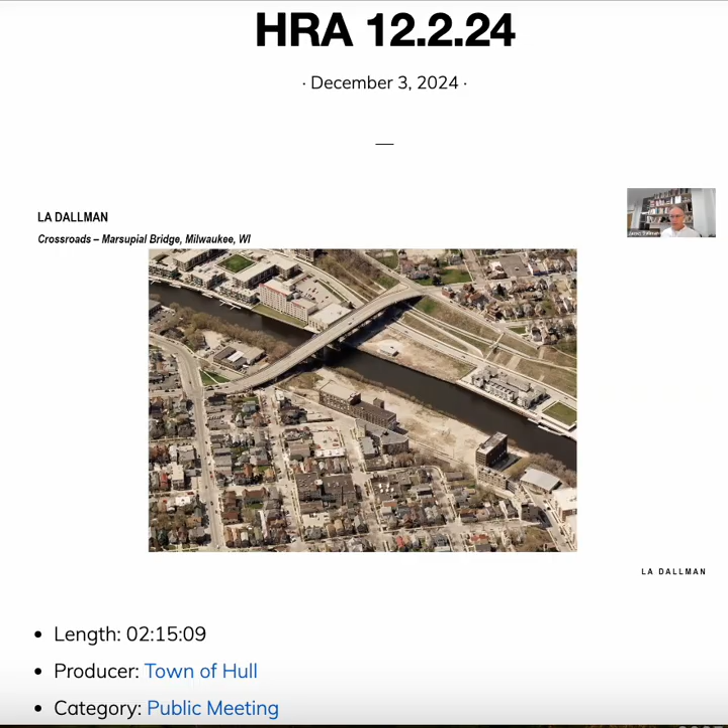James, over to you. So one of the examples is the Crossroads or Marsupial Bridge project in Milwaukee, which was on a site owned by the city, but had a number of advantages, including that it did not require easements or foundations to build a new pedestrian and bicycle bridge across the river, adjacent to two very dense and growing neighborhoods.

And the complexity of the project is hinted at by the various stakeholders that were involved, from the Department of Public Works, the Department of City Development, Wisconsin Department of Transportation, and a number of local stakeholders, including the Brady Street Business Improvement District, who provided seed money to help kind of jumpstart the project, which included connections to bus line, pedestrian bicycle access, as well as some civic space making.

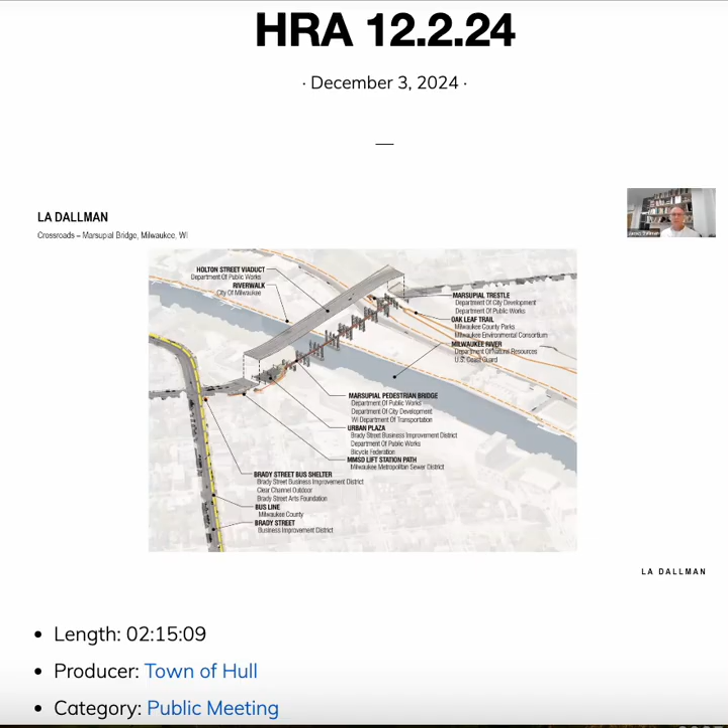The project spans 650 feet beneath this existing viaduct, which was built in 1925. So it uses that structure as its host and is carried by it, so it required very little foundation work. So it was effectively a very cost-effective use of land and structure. The original bridge used to open at the center and was overstructured for a streetcar system that ran over the top. That was later welded shut and turned mostly to auto traffic, but that had some extra capacity to support this new structure.

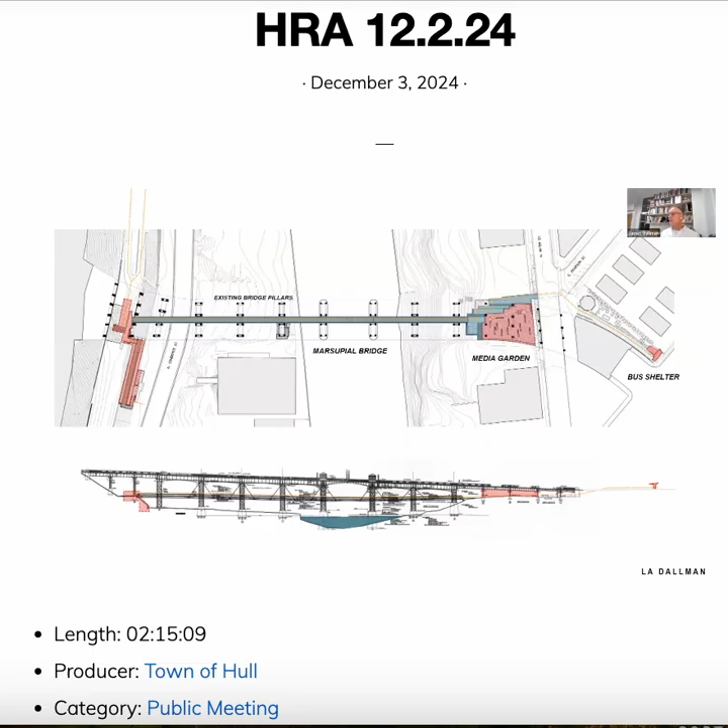So this is just kind of calling out various pieces of the project, but the primary issue was to take an existing structure that had the extra capacity and sling this new pedestrian and bike bridge beneath it.

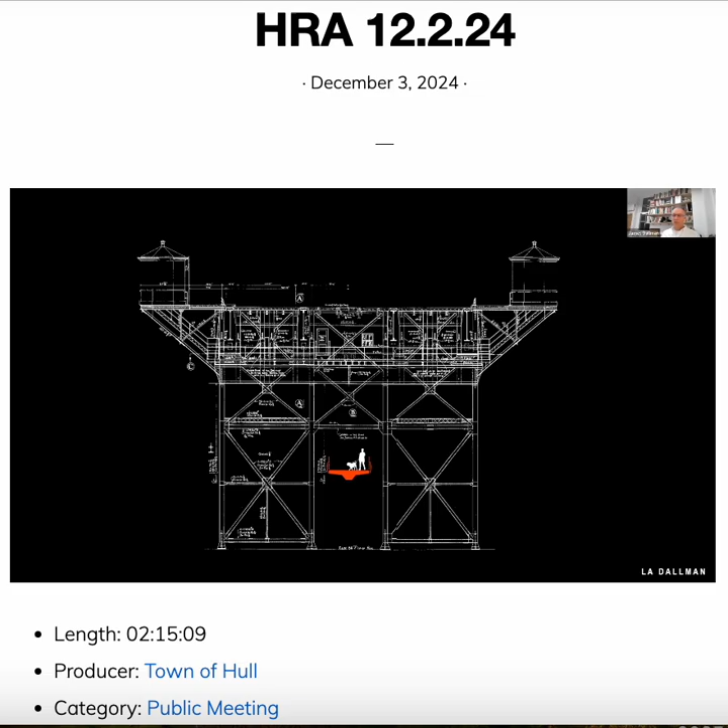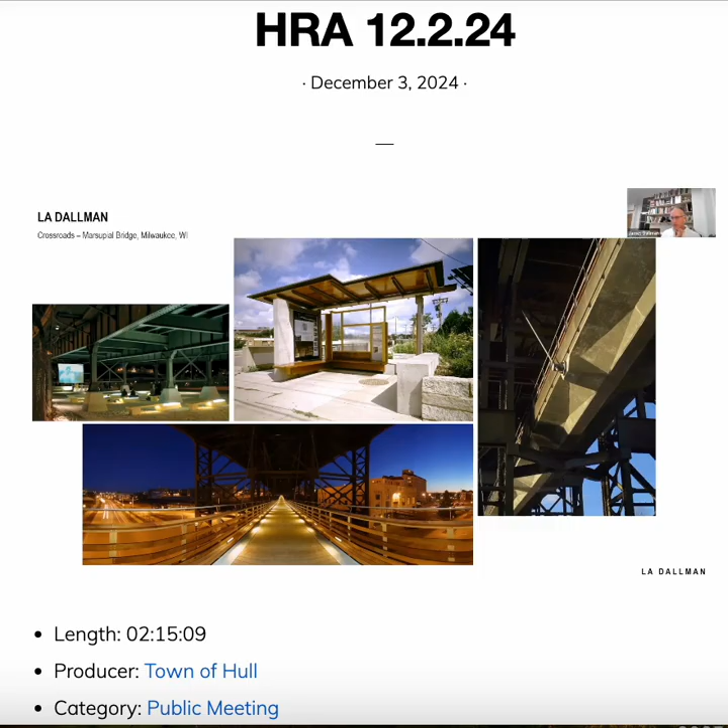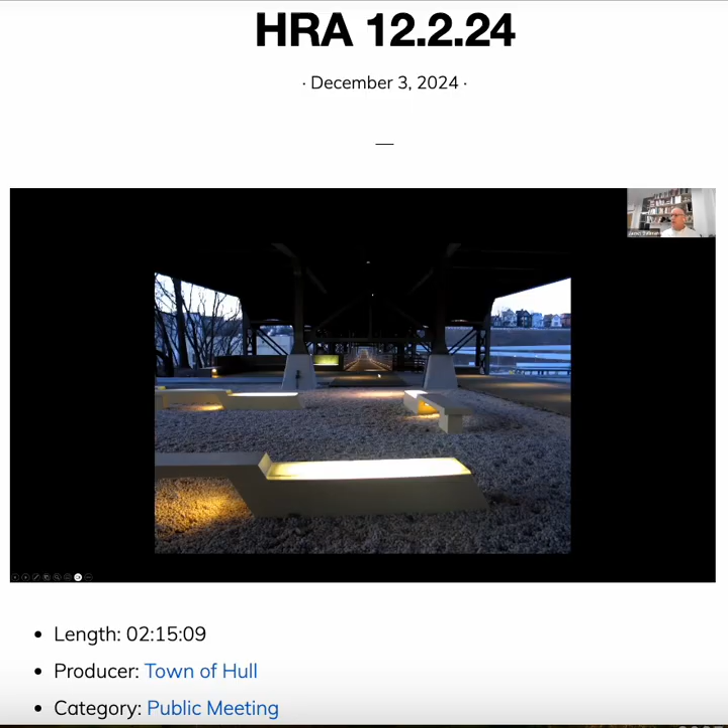The resulting components of the project, and in the middle, it really started with this bus shelter, which was funded by the Brady Street Business Improvement District, along with a master plan study for the whole project. It has become something of an icon in the city. It's very approachable from both directions. It has public spaces at both ends, and these spaces have been used for a variety of obviously daily use for bikes and pedestrians, but also a number of arts and civic events taking place in these public spaces.

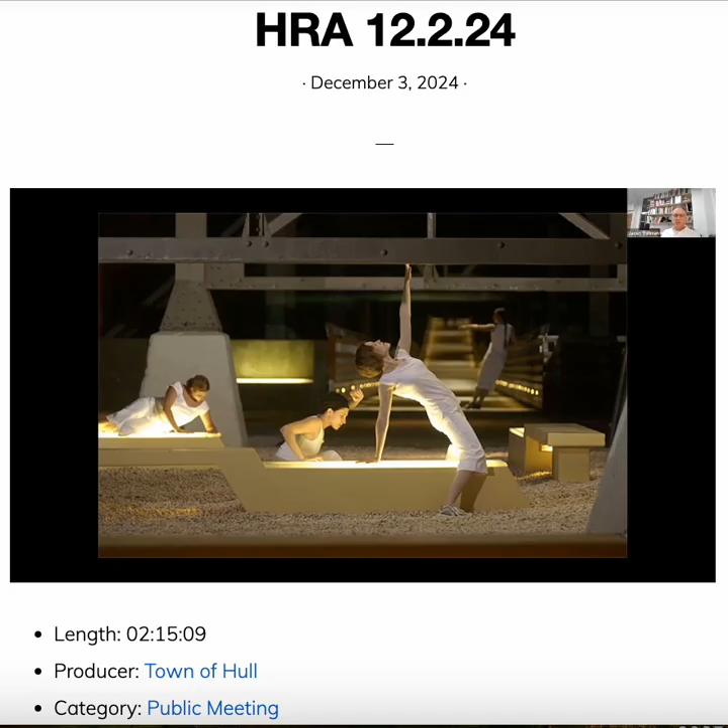The project really, again, started with the seed money from the local business improvement district, which drove a master planning process and the building of the bus shelter, bus stop structure, which was kind of the beginning and the gateway into the project. And that was leveraged for continued funding review and grant proposals by the city that we helped them write, that went after federal funding through congestion mitigation and air quality improvement grants for pedestrian and bicycle infrastructure.

The project I just mentioned took about 12 years from beginning to end. We're also the kind of practice that has the staying power to work through very large, complex civic projects, sometimes of long durée because of that nature.

Another project currently ongoing is a pedestrian bridge, a shared use path bridge in Concord, Mass. They had initially done a feasibility report to look at sites to connect across the Assabet River, and invited us to look specifically at the design components.

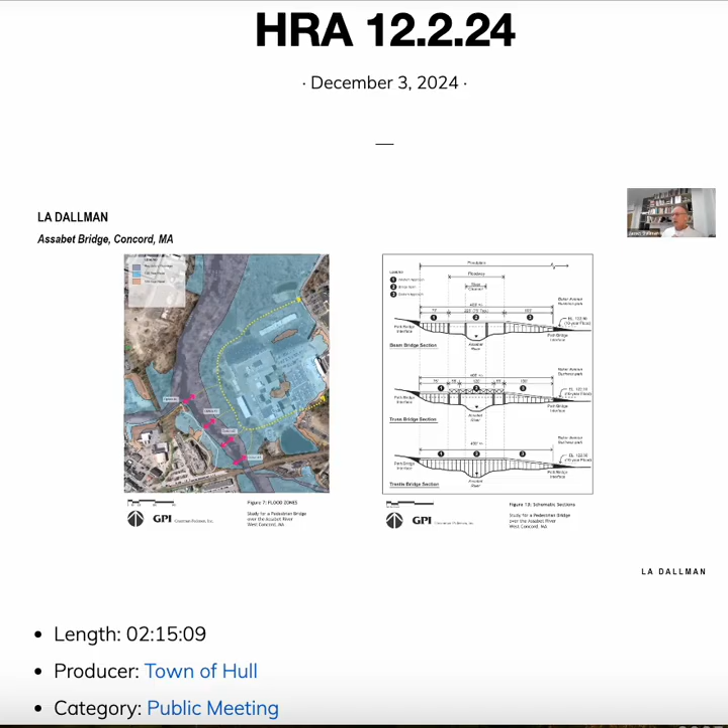This is an engineering report they had done to test feasibility, but it was lagging behind and not getting funding, so it needed a jumpstart to push it ahead with more civic impact and consensus building. We were asked to come in, provide a series of designs, review them with the public, and build more consensus and community engagement.

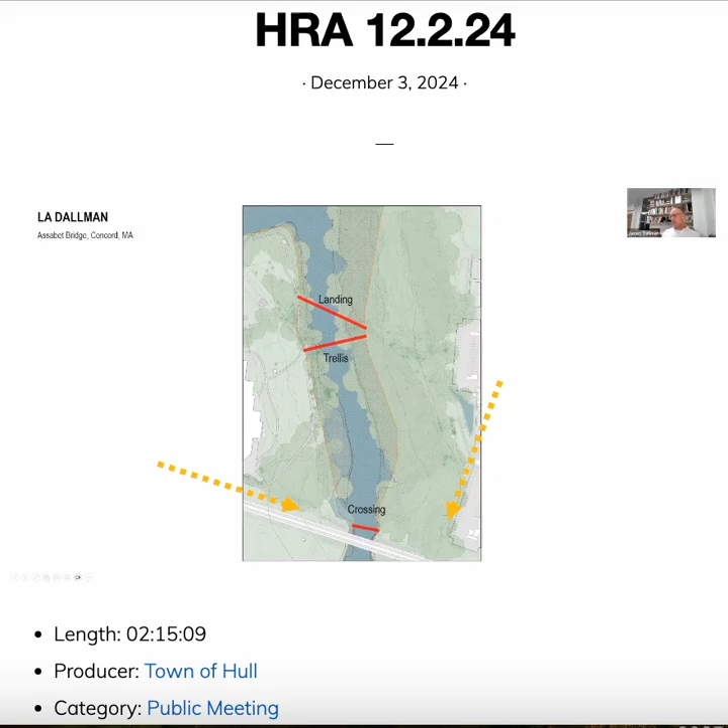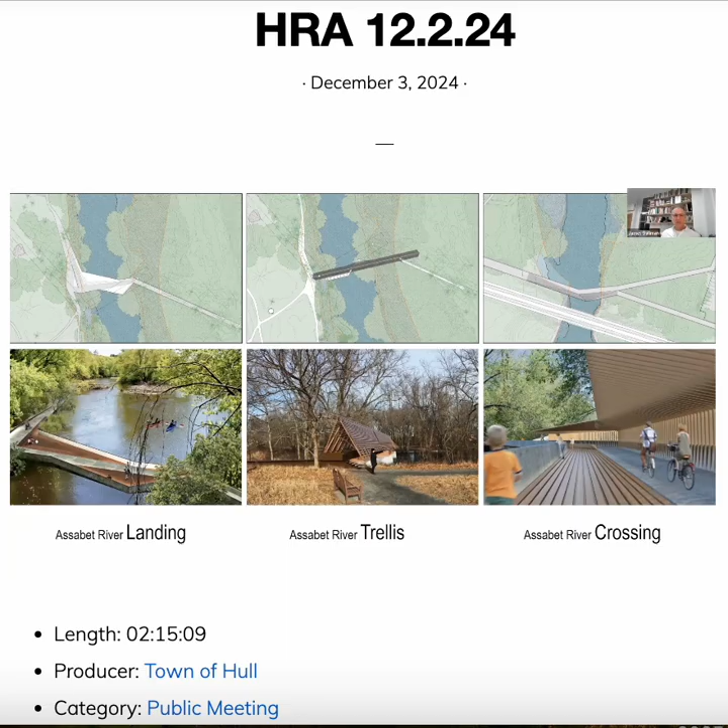We presented three schemes: the crossing, the trellis, and the landing, at different points along the river. The crossing scheme, at the bottom, is closest to an MBTA rail bridge, which provided an interesting opportunity—it's the one on the right in this series of presentation studies we made to the community at a public meeting.

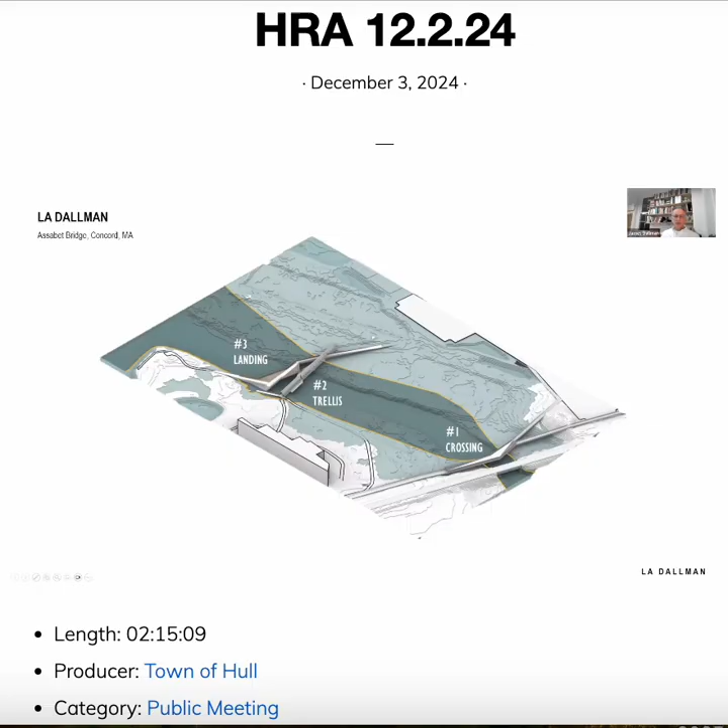We ended up with the crossing scheme, closest to the MBTA bridge, retaining the most open space of this conservation land. It's closest to adjacent development, has the shortest span across the floodway, and was immediately adjacent to the MBTA bridge, which caused complications since it felt very close and impacted by the train. So the plan included a veiled structure which shields it from the MBTA while providing coverage underneath.

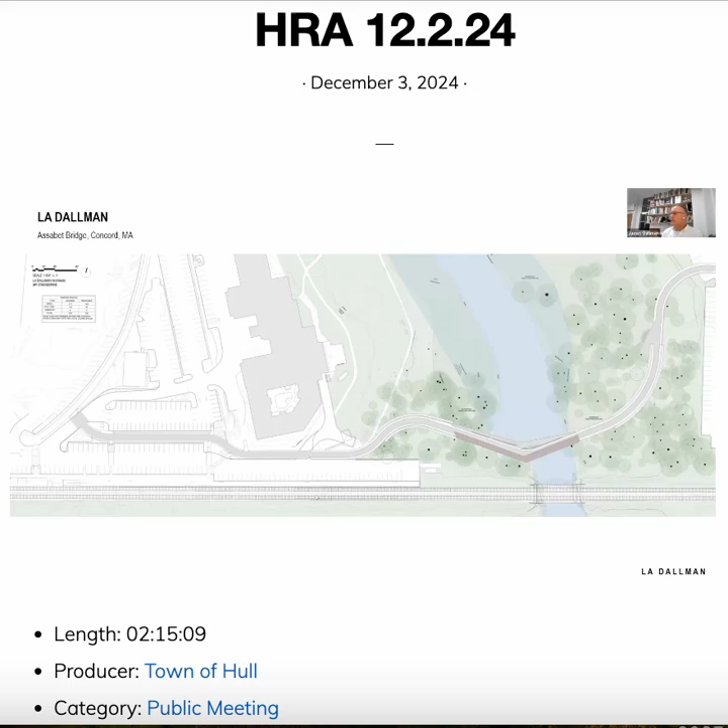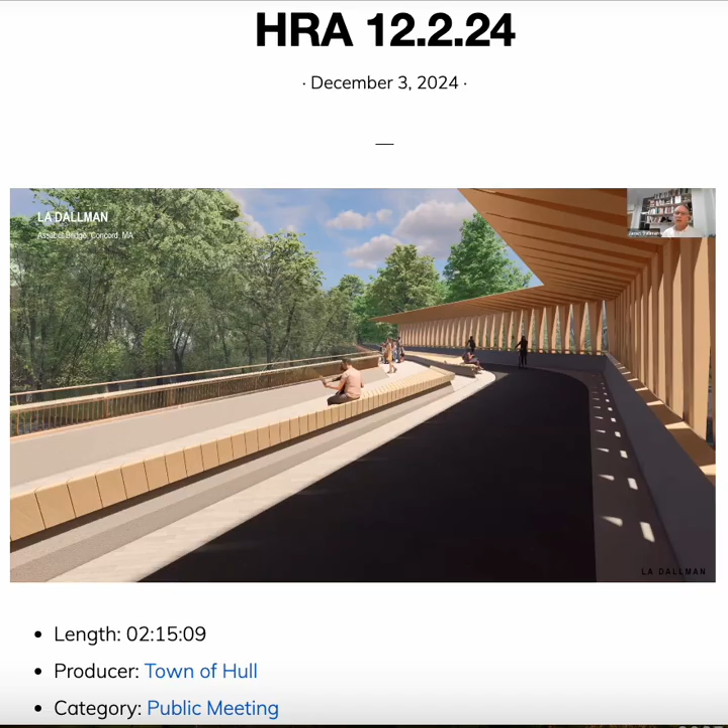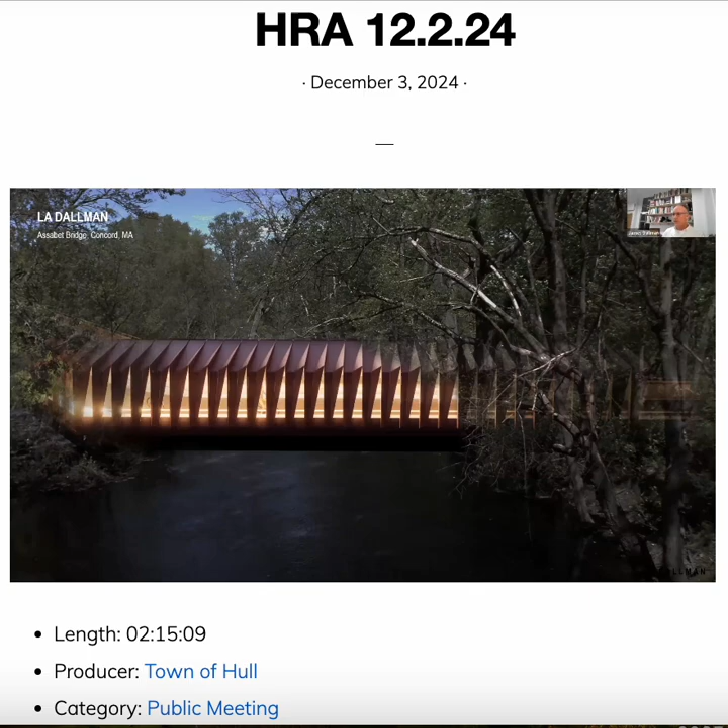This is a view of the current plans, heading into 25% plans submitted to MassDOT. We've gone through the initial phases of review and are at 25%. There's a shared use path, the veiled structure along the MBTA bridge, and a public plaza at the center span overlooking the river, creating a public meeting space. This is a view from the MBTA bridge as you pass by the site.

This has gone through public meetings and workshops to tune the design, pick a favorite, and get the public engaged. A Mass Trails grant and CPA funding were submitted and approved. There have been more town meetings to review detailed design and more MassDOT funding approval, and we're at the 25% stage right now.

This is really one of our favorites and perhaps one of the most complicated projects we've ever done—the granary project. It's a wood structure built in 1901 to hold grain for the community and for long distance shipping, from upstate Wisconsin in a small town called Sturgeon Bay.

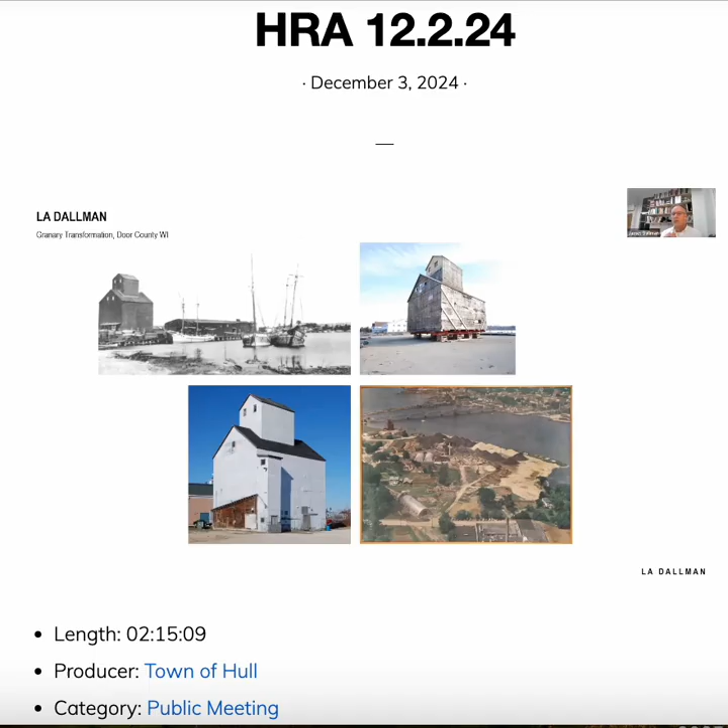It was originally one of thousands of local distribution hubs for grain, spaced out at about 7-mile increments so farmers could reach them in a day's ride. But there are now only two of these remaining on the Great Lakes, and this particular instance was saved from demolition by a community group that had it listed on the National Register of Historic Places.

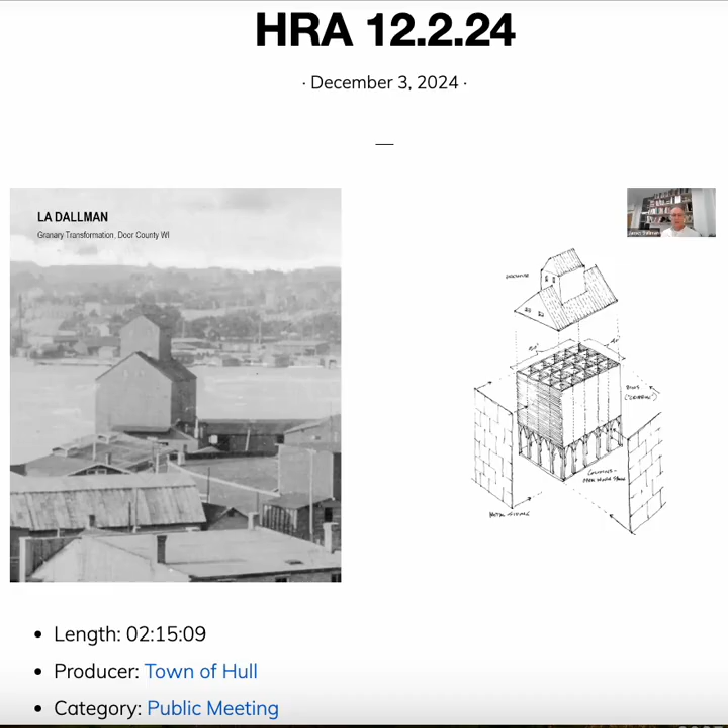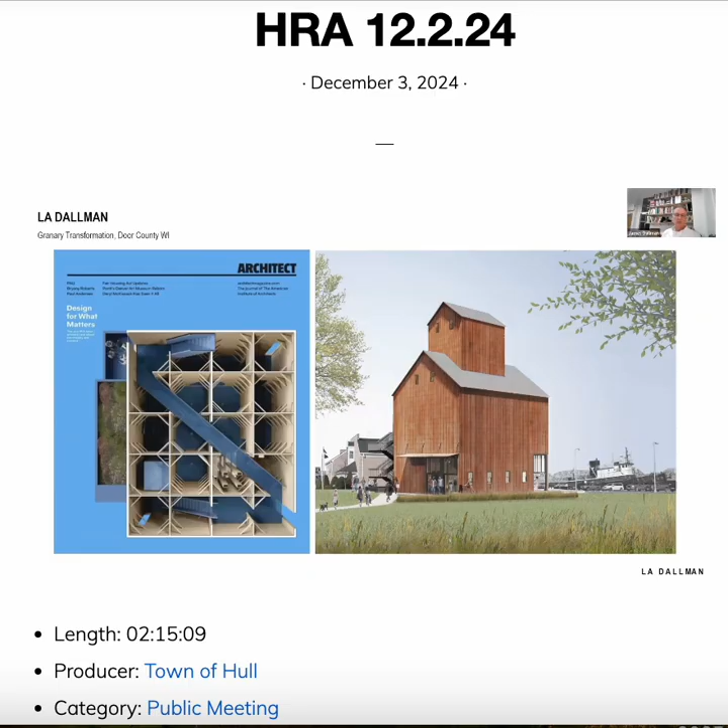It's a massive structure, very simple from the outside but with a very complex interior of solid wood walls. We went through a master planning process with them and won a prestigious Progressive Architecture Award for the master plan design, praised as innovative adaptive reuse, which also helped them tremendously with fundraising.

The project includes this tall ground floor space with new windows, converting it into a museum with a series of passages and a staircase leading to the top of the structure to activate it for public use.

We just completed phase 2 of the project, which opened a few weeks ago. It's now fully enclosed, has restrooms and support space, and is clad in reclaimed material from another granary being torn down in the area. It also has new steel windows.

As I said, this was frankly one of the most complicated projects I've ever worked on. It involved many reviews with historic preservation officials at the state level, local coordination, and DNR review because it's on filled lake bed.

The master planning for the project really helped motivate a lot of the fundraising and the approvals, and in fact, the building had to be moved back to its site after being partially condemned, before it was listed on the National Register.

James, I'd like to interrupt and ask a quick question. Could you go back to that beautiful image of the cutaway of the building as you redesigned? What were the ADA requirements in regards to people accessing the building?

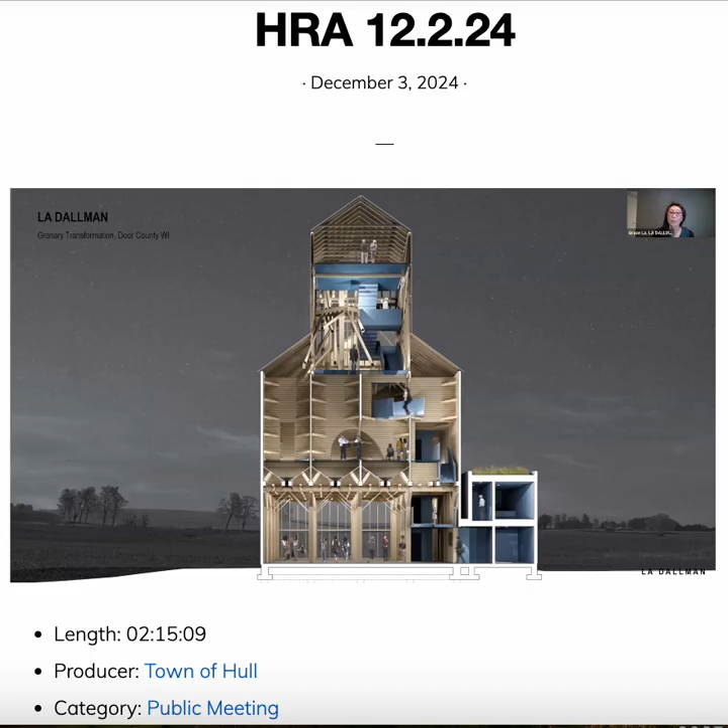Has this been done now? Phase 2 is complete, and we're on phase 3, which will bring the upper head house to life.

So the ground floor is now open for public use, and they're holding functions there already. The building, as James mentioned, has been brought back to its site. There's a very funny movie you can find online of the entire building being moved across the bridge. And it's been reclad, so it's weather tight now.

The goal is to get into the 3rd phase. This is actually staggered as well, partly due to fundraising issues, so the organization we're working with can build funding capacity in pieces to pay for it. The 3rd phase will bring the head house to life by allowing the stair to reach that top level.

We just had a soft opening for phase 2, which makes the building fully accessible at the ground floor. The project was largely funded through a combination of large and small donations from individuals, driven by the master planning process and us meeting with donors and presenting the scheme to them.

We also helped the Sturgeon Bay Historical Society submit for USDA funding through the state, and they acquired an additional $3.2 million out of that state funding. They had originally raised about $2 million through private donations, then about 3.2 through the USDA funding, and the remaining phase 3 work, including the elevator and stairs, is about another $1.5 million being raised through private donations.

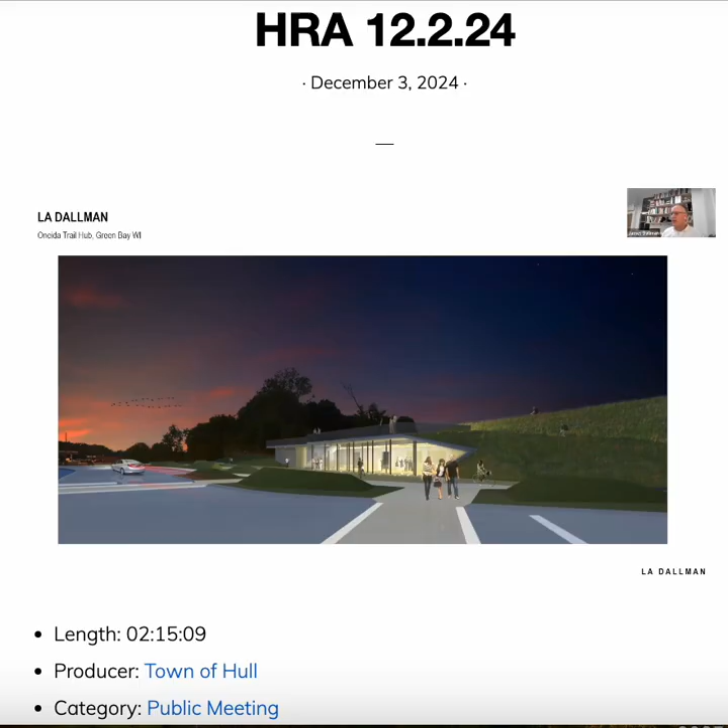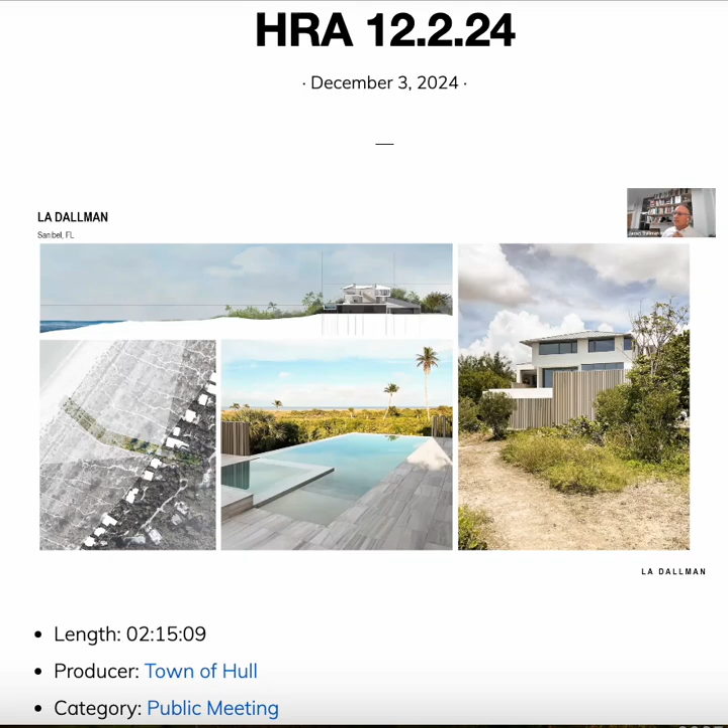There are some other projects we have ongoing, including some civic spaces for the Oneida Nation in upstate Wisconsin, and some small scale housing interventions in Green Bay. We're also used to working on coastal sites, so we just completed a house in Sanibel, Florida, with a 13-foot storm surge, that's already gone through 2 hurricanes, sadly, but is in good shape and designed to meet those requirements.

It's a private home, I assume you're speaking about? That's a private home, yes. One of the reasons we take on such a wide variety of work is so that we can, in a cross-disciplinary way, really understand certain kinds of issues and apply them to other types of projects. We find the coastal project is very much informed by the detailing work we've done on projects like the granary, so they cross-fertilize the work that we do.

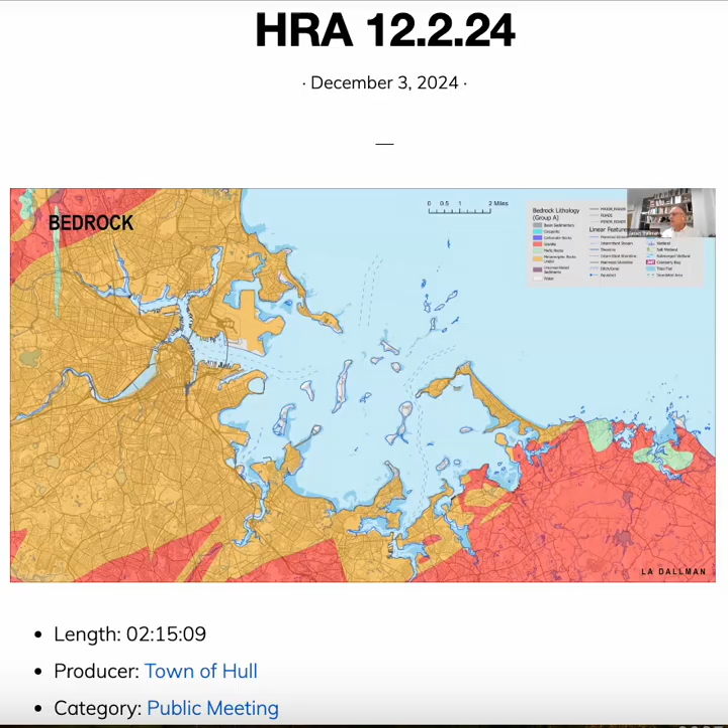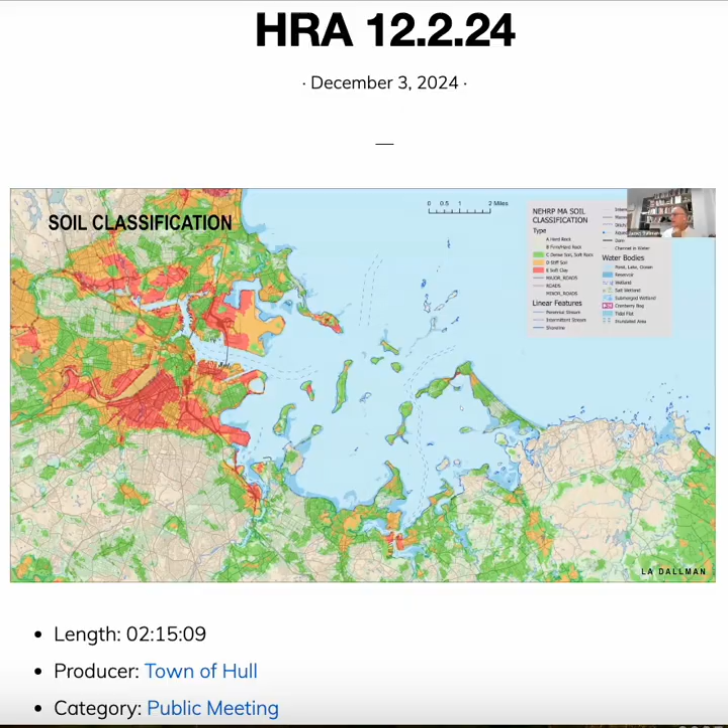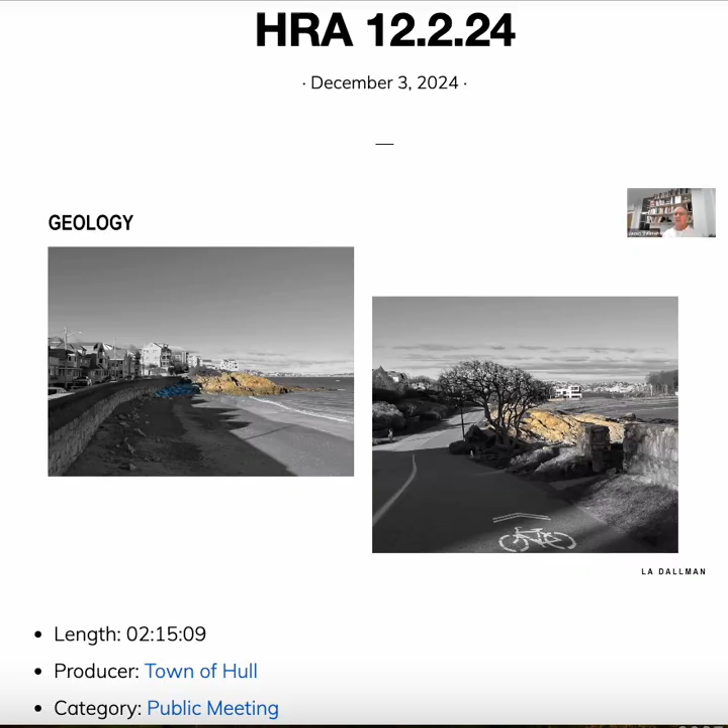The bedrock is granite and different metamorphic rock, but at the level of detail of the site, it becomes more interesting with this dense mix of hills and the beaches around Hull. We find the poetry of those rock outcroppings very inspiring - this is a moment I captured on the site. You see this frequent outcropping of granite, as well as the larger formation of the hills in the region, always changing with tide and wind.

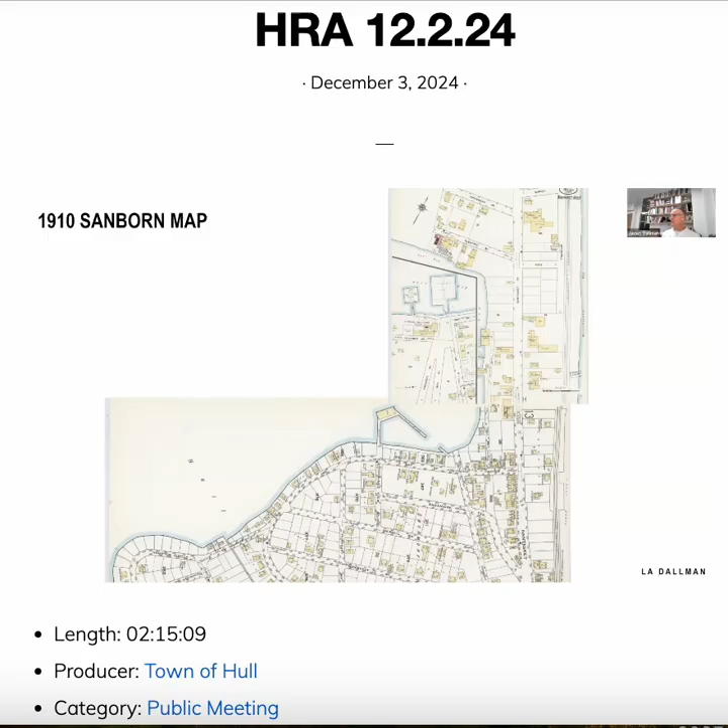Likewise, the HRA land has been transformed over the years. We noted that it's very interesting that it has had buildings on it in the past as an extension of the business district. It's not really virgin land, it's been changed over time. But unlike many of the iconic conditions of Hull, the site doesn't seem to have a particular identity, at least as places that are named in Hull. This is kind of an in-between space, a transition between Surfside and Whitehead.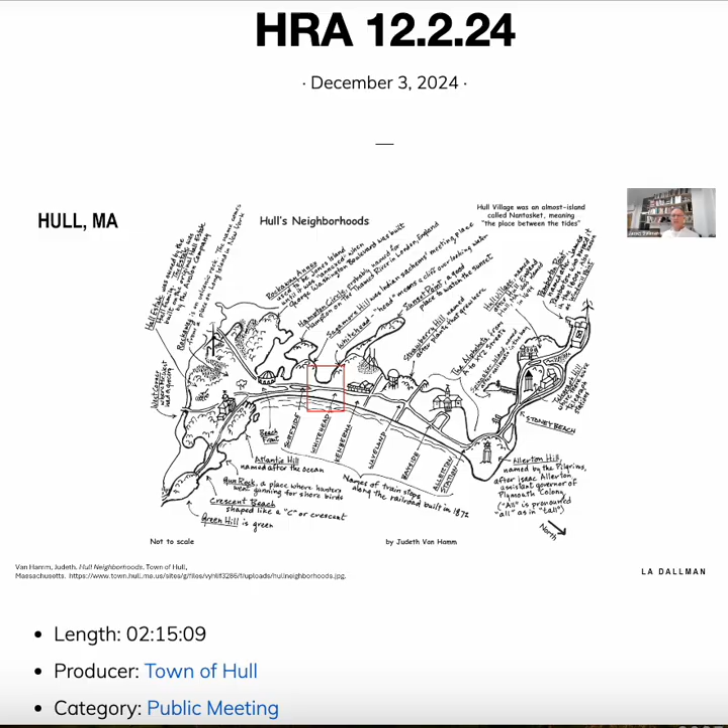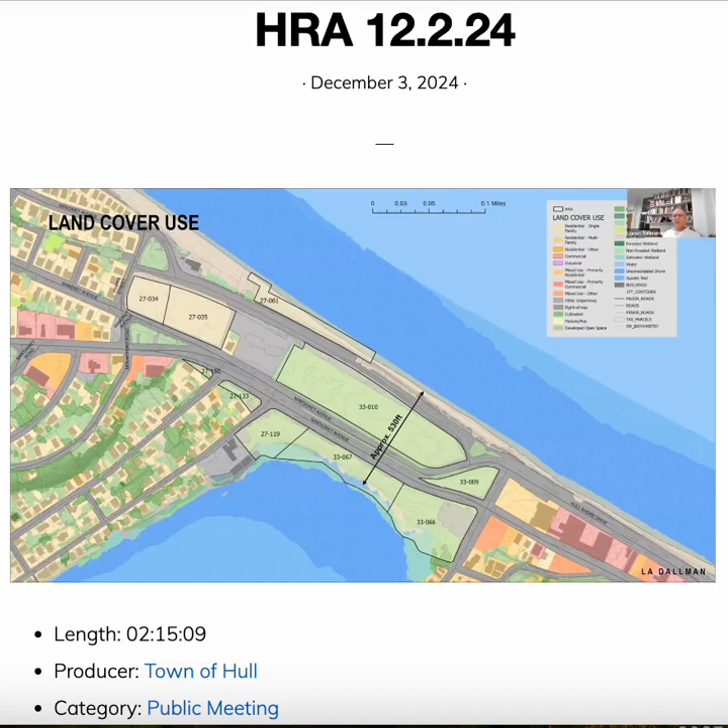So our current understanding of the site, the total acreage, this broad 530-foot wide space between the Salt Marsh Bay and the ocean. But we find it interesting that within a short distance, the site shows a very interesting identity from the Salt Marsh, the road itself, the open green space, another road, and the ocean. I took a series of photographs when I was out there last Sunday that describe that subtle transition from one space to the next. The sheer breadth and scale of the site is really spectacular. I happened to catch it on a day with a low tide.

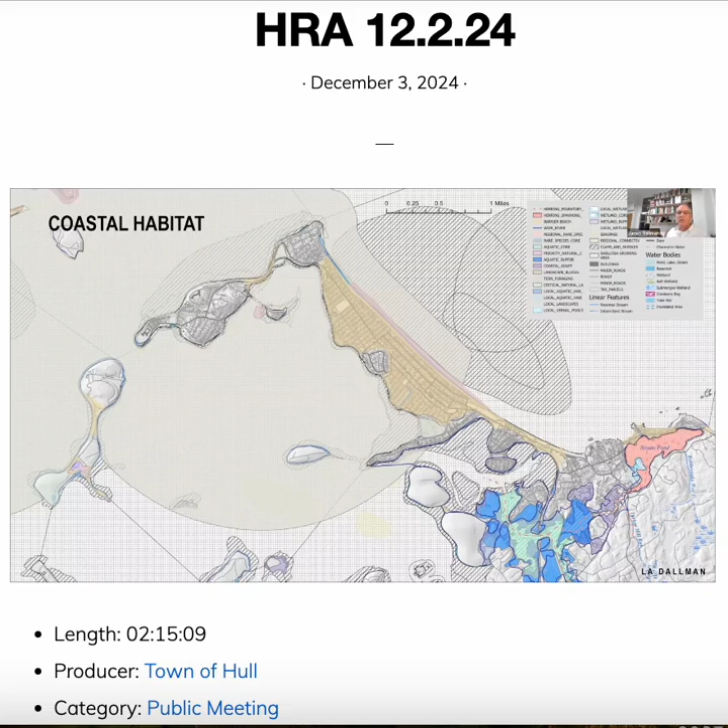As a barrier beach, Hull provides protection for the aquatic zone, the habitat and salt marshes to the south, home for rare species. There's always kind of a reminder of the natural environment that surrounds the site.

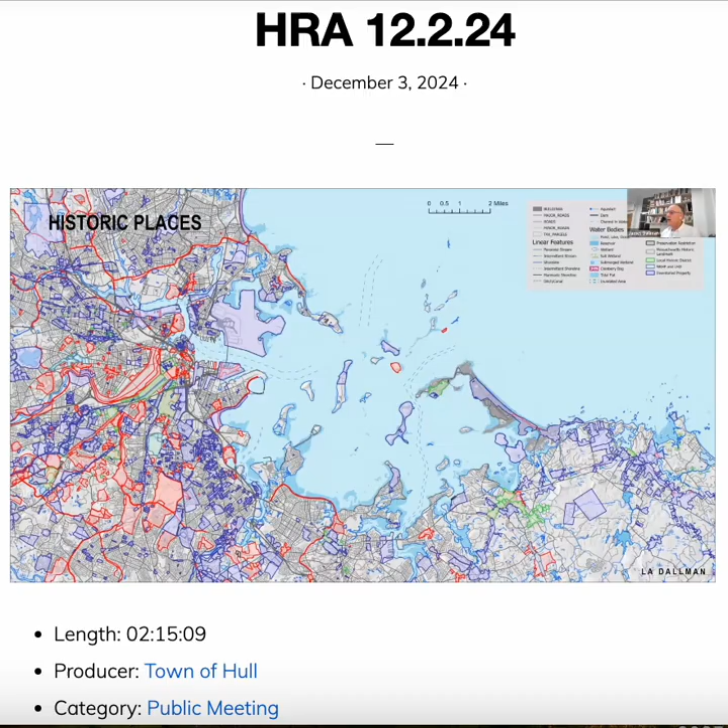There's obviously links to historic Boston on the site itself. We noted the local historic district to the north, the inventoried properties, and the national historic places, including Hull Shore Drive.

What are you referencing there, James? The Hull Shore Drive being registered on the National Register. Oh, okay, I didn't know that, so that's interesting.

By the way, we apologize because we're aware that you know this site very well, so please forgive us if we're in a way preaching to the choir when we talk about the beauty of the site. It's just actually what inspires us, and we thought we would share with you our interest in what we know about the site. No, excuse me, I'm appreciative of the fact that I just learned that Hull Shore Drive is on a list of historic places, National Register. I didn't know that. Dennis, can I ask a question?

No, of course. Going back to that previous slide, what is an inventoried property? I've never run into that phrase before. If it's not relevant, that's fine. I was just curious that some of the town seems to be inventory property and some isn't. It is interesting, and I don't know the origin of that, but it's obviously present in large areas, including some of the islands as well.

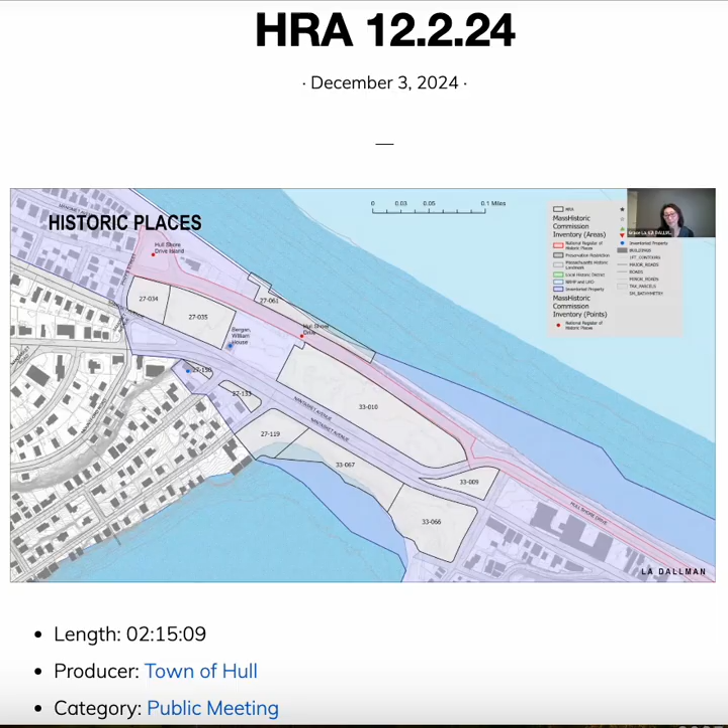This is all from ArcGIS, and it's also registered on mass government websites. We overlaid in many cases some of our own coloring to make the diagram a little bit more clear. Thank you.

We've also been looking back at some of the history. We know this site has a deep history and lots of activity, especially further south with the fairgrounds or the amusement park. This linear layering of the site has been present for quite some time, this relationship between building and landscape, between the bay and the ocean.

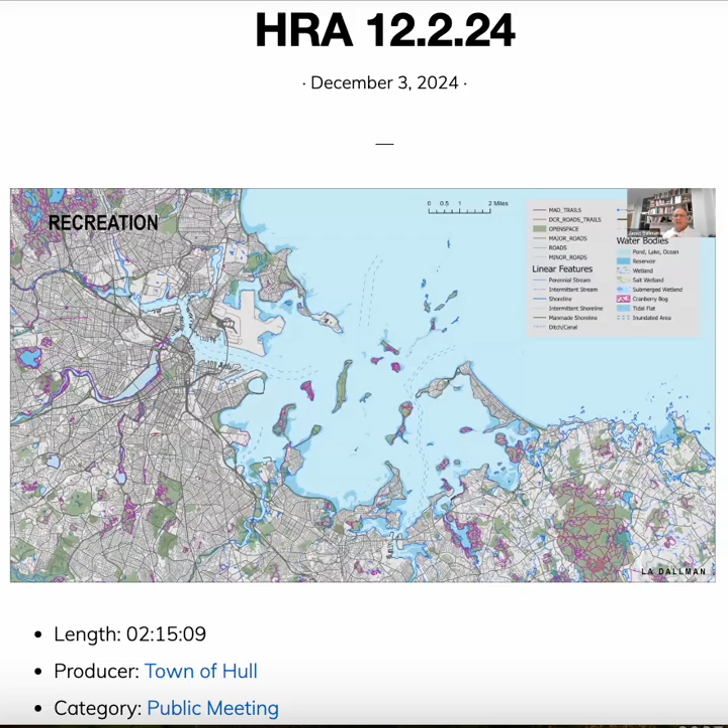Just zooming back out and looking at recreation, that's a key part of the site's history. DCR obviously has a lot of property and stake in this area, and I think the coordination with DCR lands and DCR objectives is critical for the HRA and for your site.

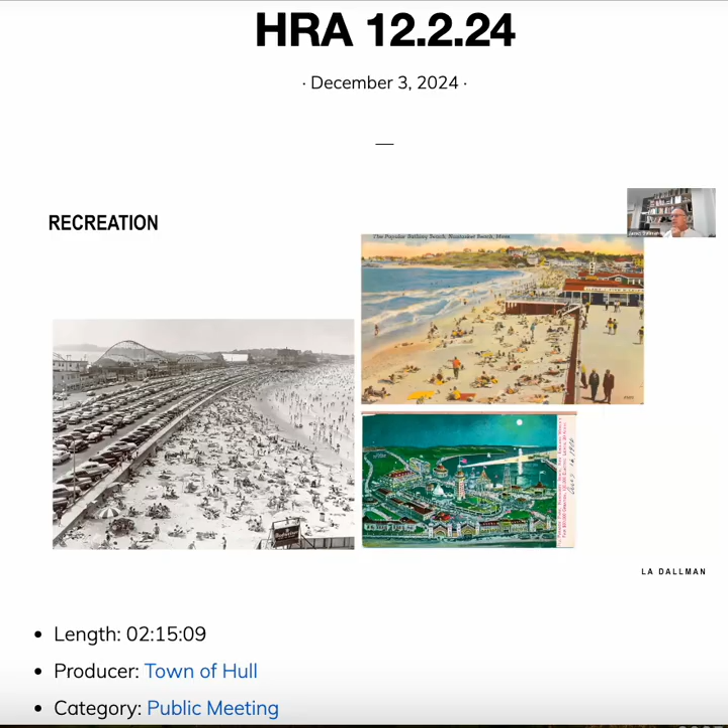Site access is obviously important for a peninsula. How does one get to Hull? Obviously there's car, ferry, bus, bike, walk, and all of those different circulation patterns come to a neck through your site and become very critical.

Bike trails seem to kind of terminate at the site at the moment, but it would be nice to see the bike trail continue on. The 714 bus runs past the HRA site, but for some reason the bike trail kind of terminates.

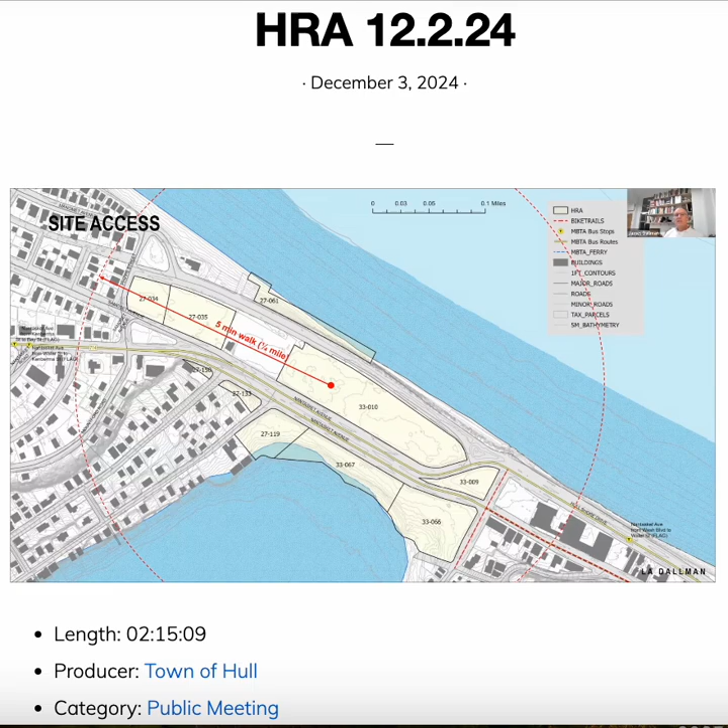We understand that the Hull trolley is no longer running, but it's certainly an interesting part of the site, and there's potential for multiple modes of transportation through the site.

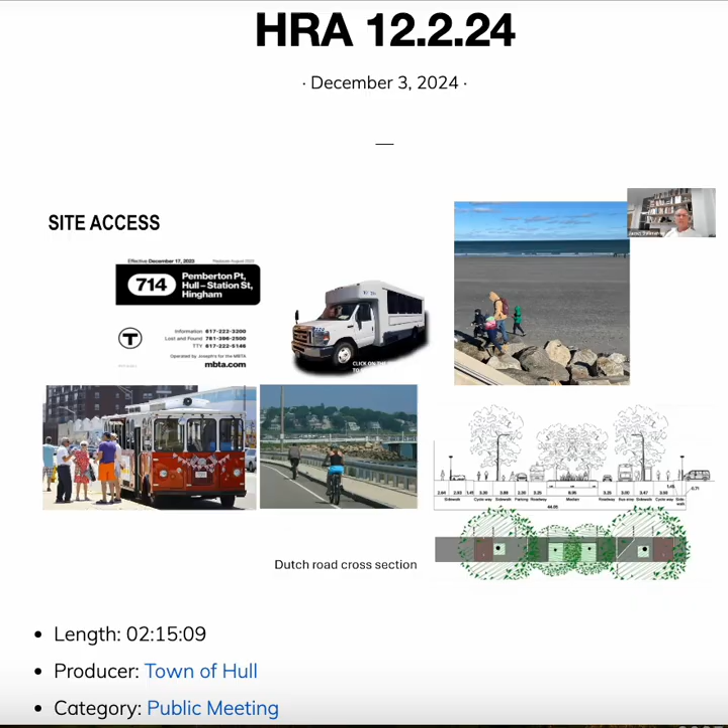Zooming out again, obviously the category 4 hurricane coastal hazards are a really big issue, and this is all generated from our GIS as well.

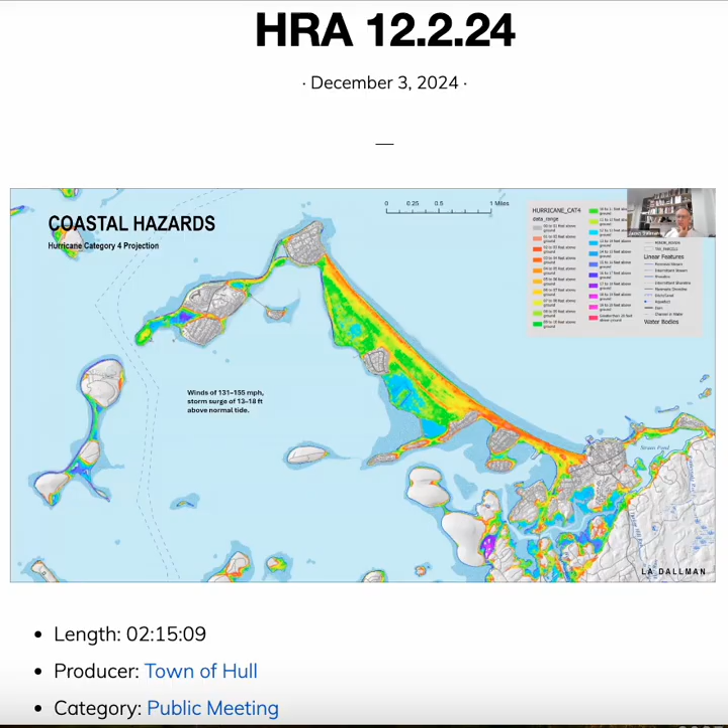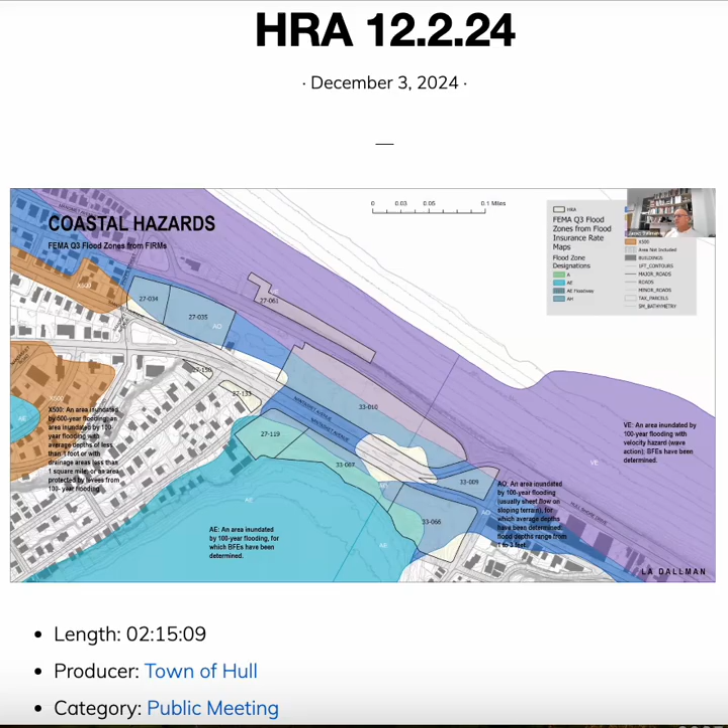Flood zones at the big scale and at the scale of the site: there's a 1% chance of flooding over most of the site.

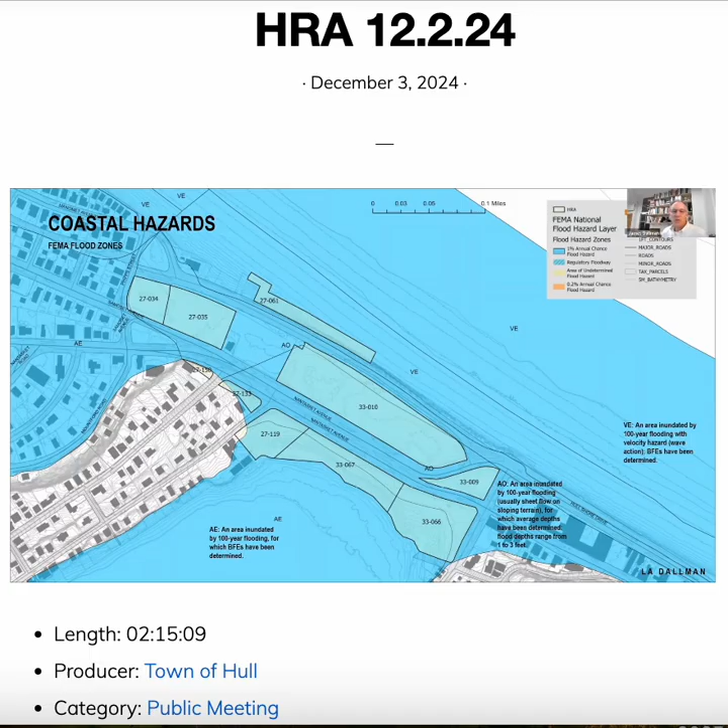That's very helpful to understand the relationship with the topography, because it does actually look relatively flat, but once one really understands it, there's technically a lower point where the flooding would actually inundate.

So we just did a quick GIF of the future projections, current and future, based on GIS of storm events inundating the site.

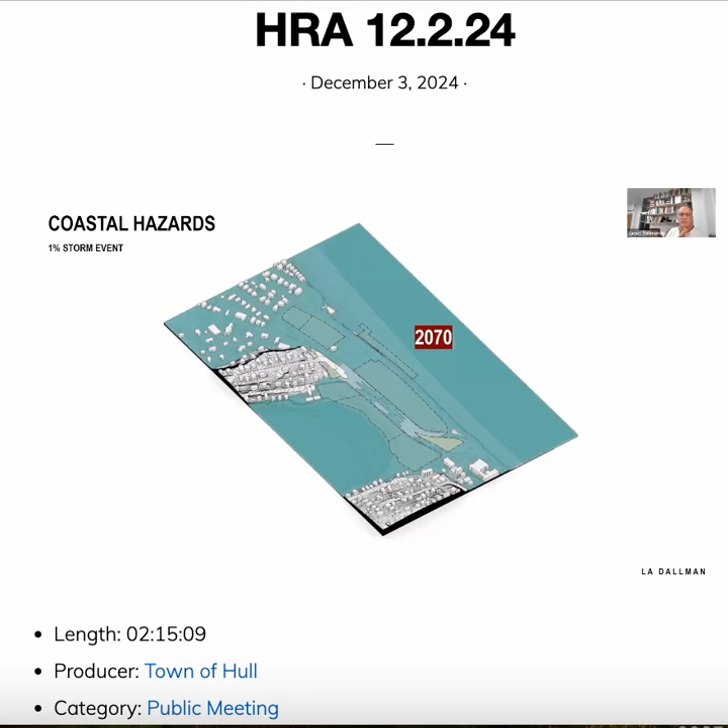So next, just sharing some ideas. We know there have been a bunch of proposals and site studies completed since 2015, and there's a lot of really good information there, and we know you have some ongoing work with the road improvements.

But we've also seen the surveys about walkable space and gatherings being two of the most important.

I'm going to interrupt here - where did the survey come from? Was this the one we talked with Erin about? This was from the Hull Times. Yeah, so an independent poll. I'm going to ask you not to spend any time on this, only because we talked about this at one of our meetings, and it's more of what we call a polling survey. So let's keep to a high level. Sure, that's fair. Thank you for mentioning that, we want to keep it moving and share what's relevant.

Just in general, some of our takeaways were that there are 4 major theses or themes: to connect and give Hullonians greater access to the Boston metro area, to respect Hull's history, native habitats, and public access, to protect the HRA site from flood events due to climate change, and to sustain through funding and revenue for the HRA site.

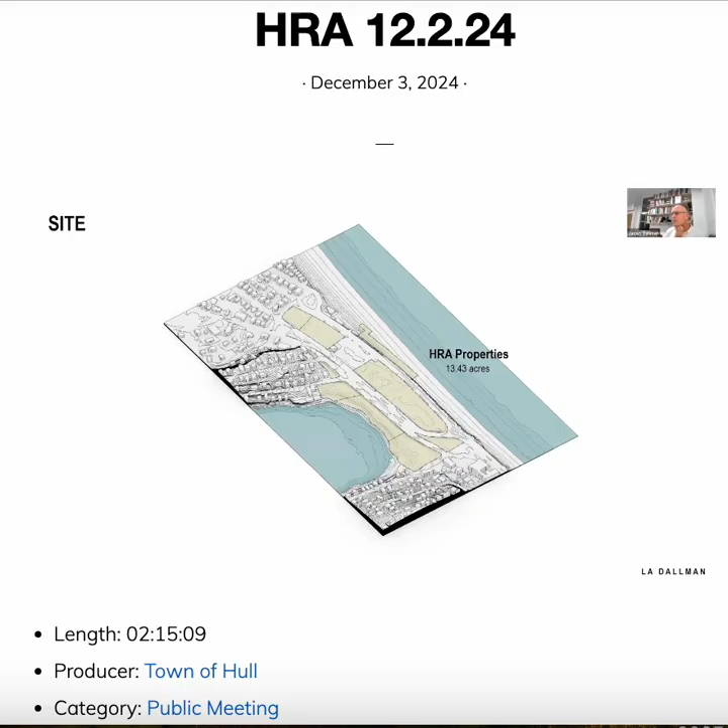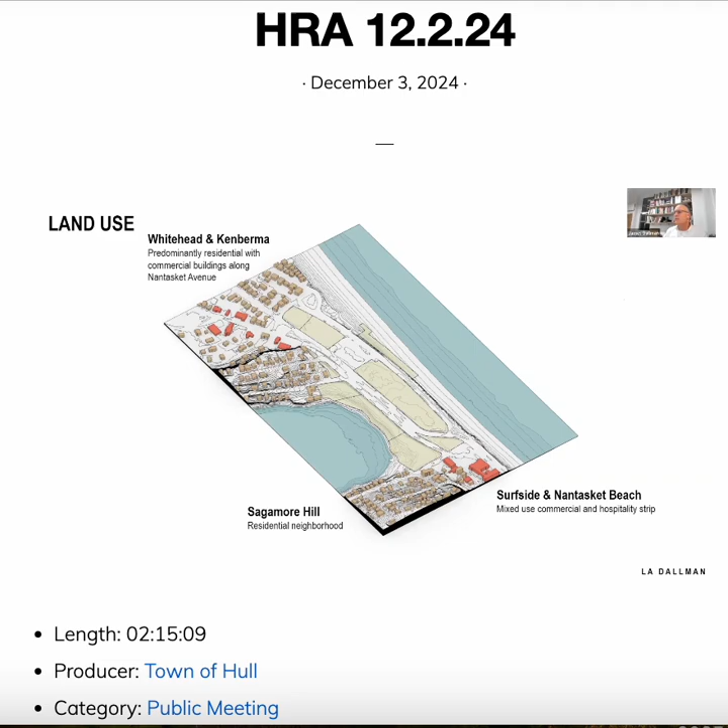This is a quick overview of the site in 3D. Just looking at the key components, looking at adjacent neighborhoods and mixed use, housing and mixed use, looking at access, the main circulation patterns, and looking at travel times.

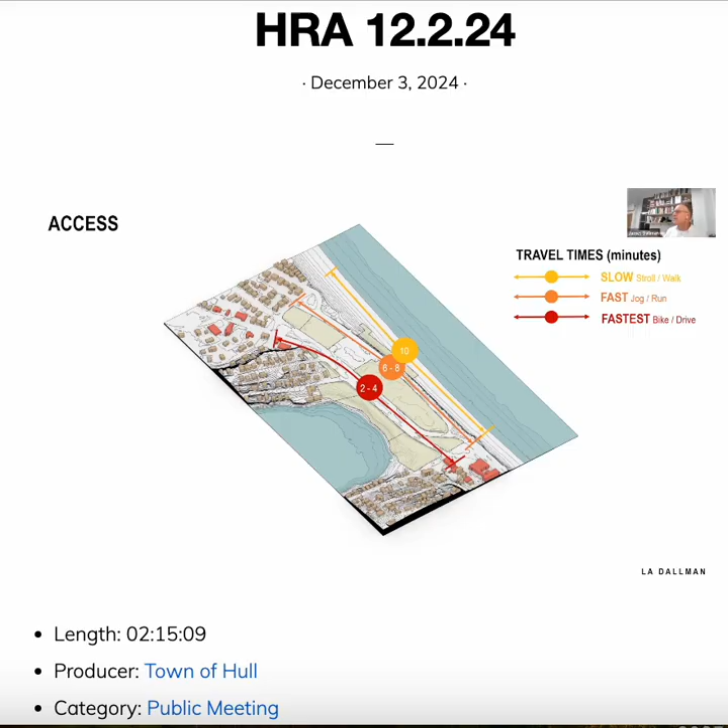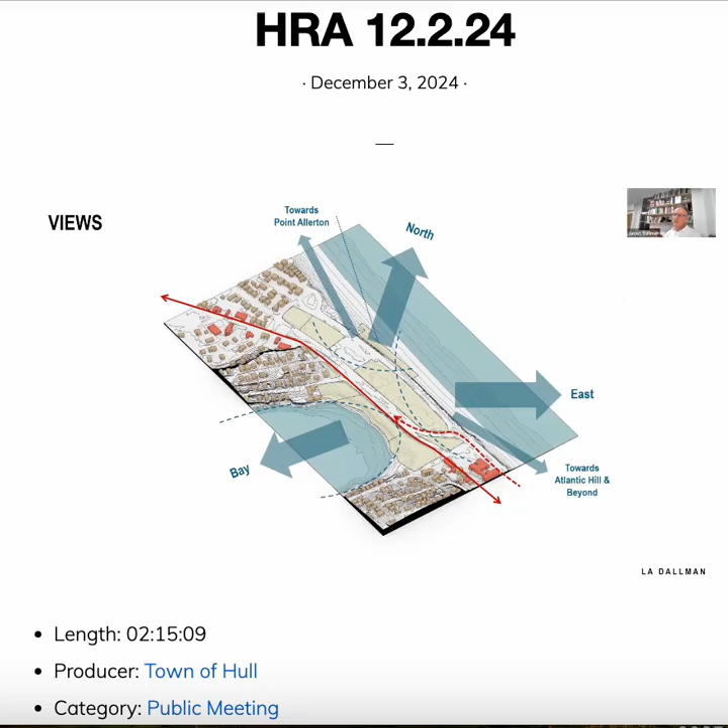Looking at the key view sheds, and that cross section through the site is so interesting and gives you these views back to Boston and out to the ocean, as well as diagonal views up and down the coast, exposure to sun and wind.

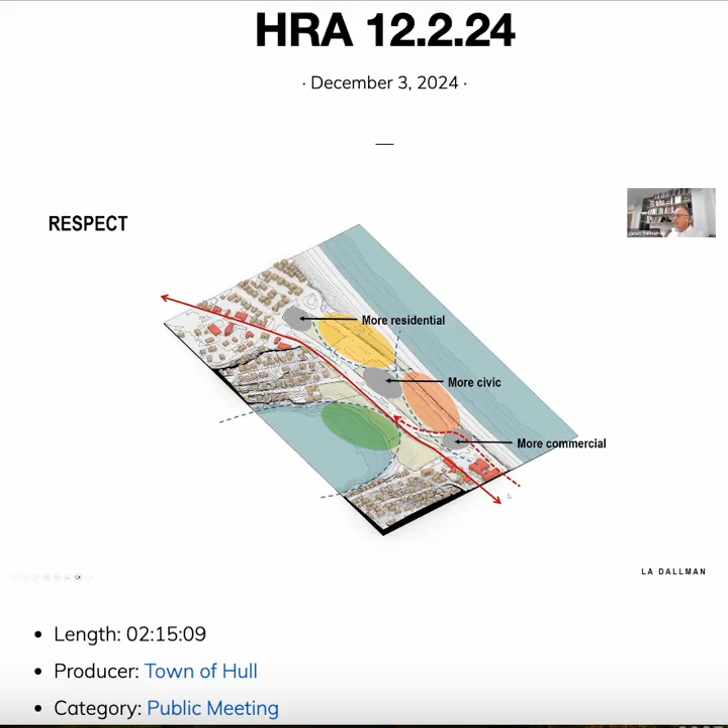This leads us to thinking about conceiving of 3 public zones within the site, where each district has some identity and use based on association with the adjacent environment and context. So it seems like there's recreational, civic, and natural exposure, with some alliances with context - more residential to the north, more commercial to the south and east, and more civic in the center.

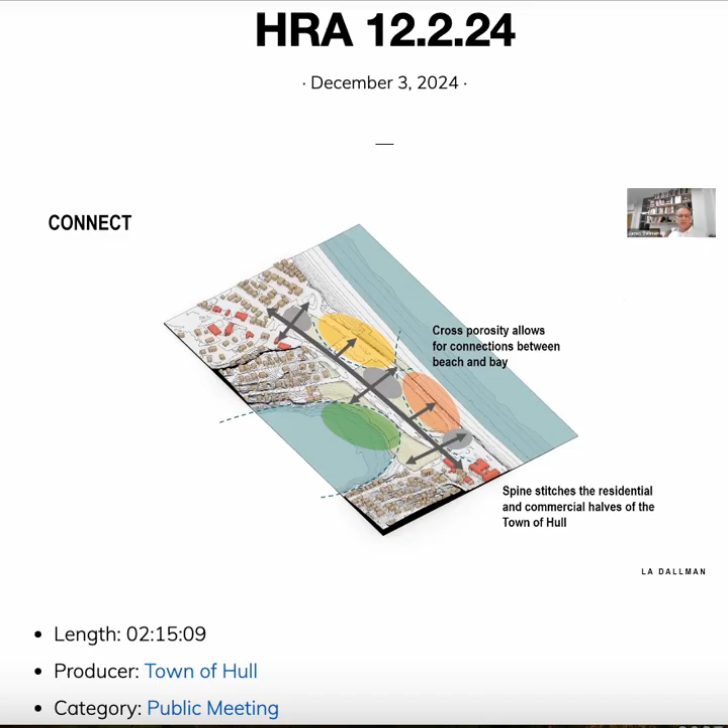The gray zones could be more programmed or built out with more intervention, with a spine connecting them together and creating cross connections across the site. There's continuity of infrastructure potentially connecting the groundscape and the built form, with boardwalk edges.

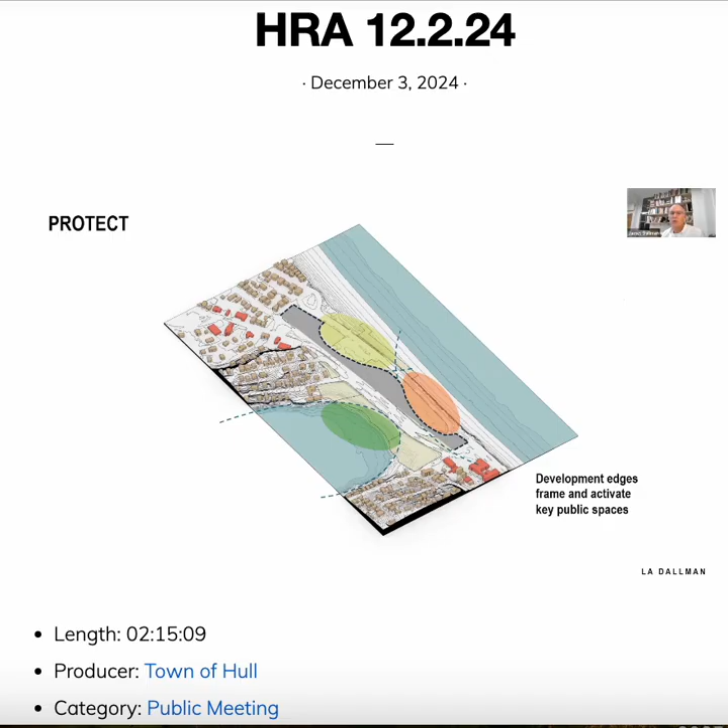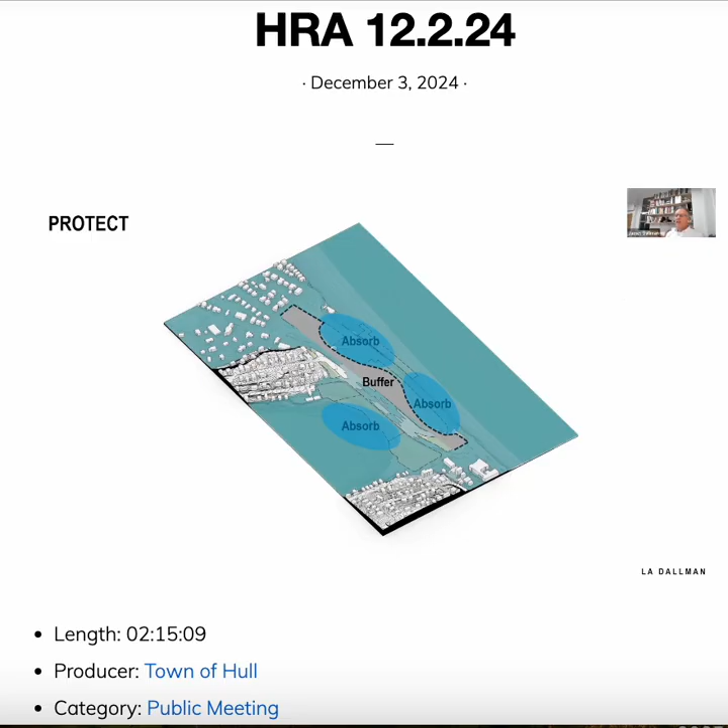The result of this way of thinking about the site is that there could be a greater sense of connection to the floodplain and protection from flooding. So the beach in some ways is sacrificial - the outdoor zones can absorb some wave action and allow standing water to infiltrate soil, whereas the buffer zones could be a little bit higher to keep the road and infrastructure out of harm's way.

One of the things we just thought we'd mention is that based on other projects we've done and what we see as being potentially of use for you, is a master planning exercise.

We would summarize by saying the master plan should recognize the potential of buildings and landscapes together, where both are mutually valuable and precious. This notion that the site has an opportunity to do both - to be open and developed in some way for public use. Framing and activating public spaces development can contribute positively to the economy, vibrancy, and civic life of the city.

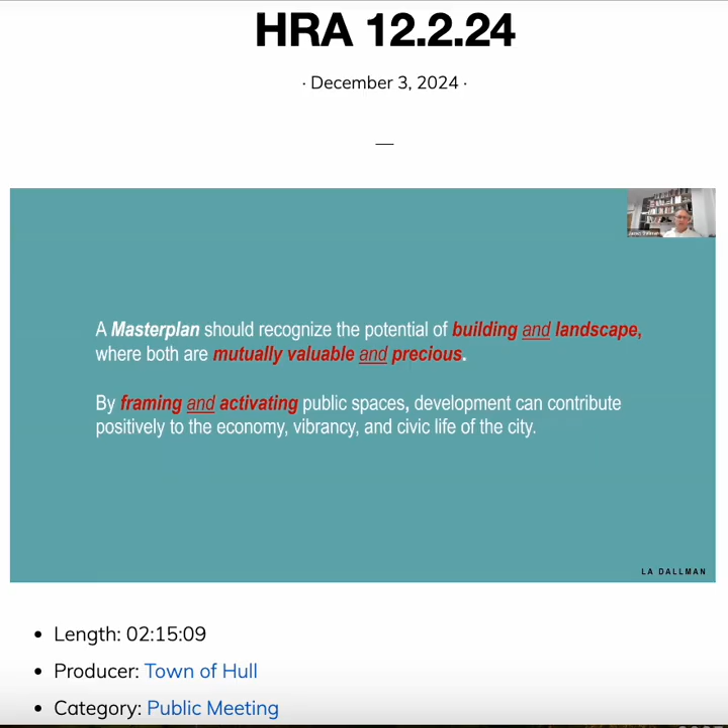We also thought we should share with you some things, because our research has been around public space and these many similar conditions in a lot of our projects. We thought we would share some of the most inspiring kinds of projects that we looked at throughout the world, just sharing some ideas we've had.

We're really aware that public space and open access to waterfront is important. You see this already in developing some of the nicer parts of Boston that are trying to achieve this.

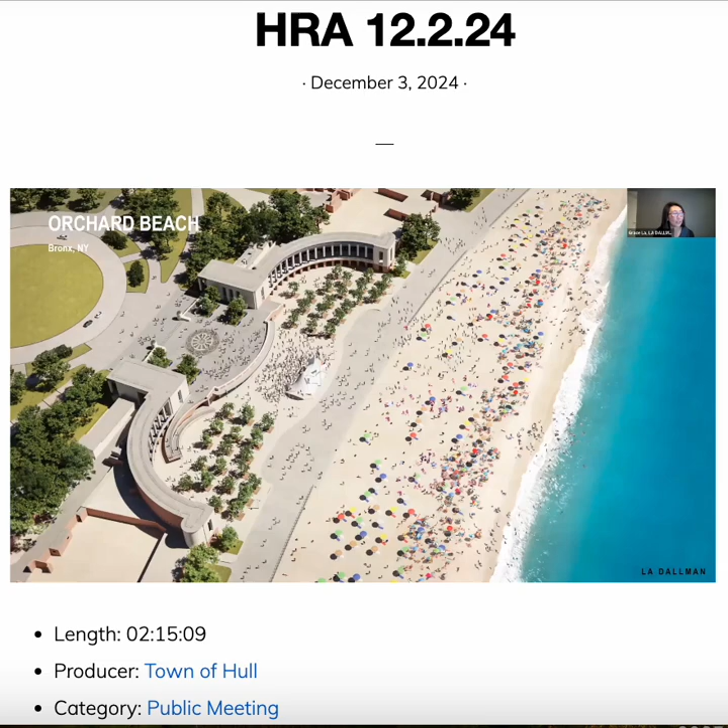Next, combining both park and beach - these are examples from all over the world which we find interesting. Architecture in this case is cupping the open land and connecting both the park on the left-hand side and the beach itself.

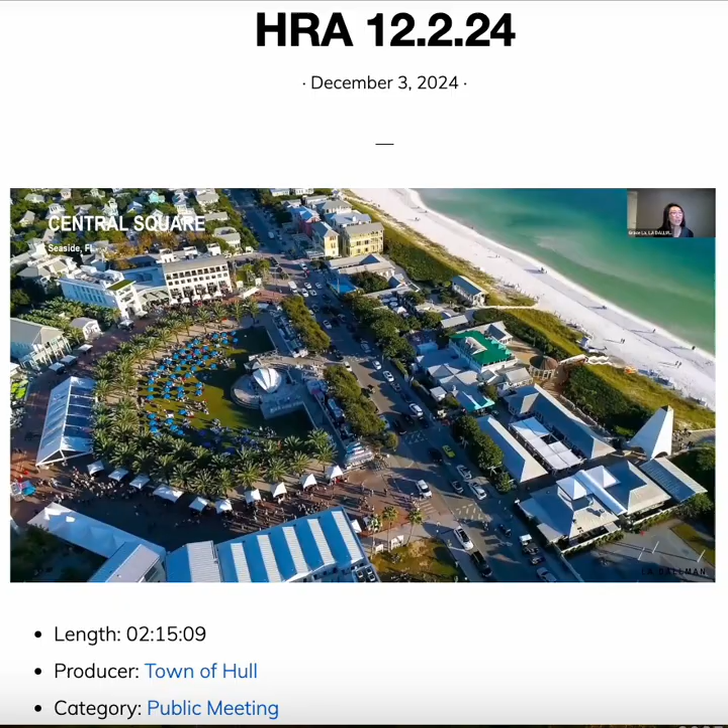This condition where the architecture actually supports the civic realm.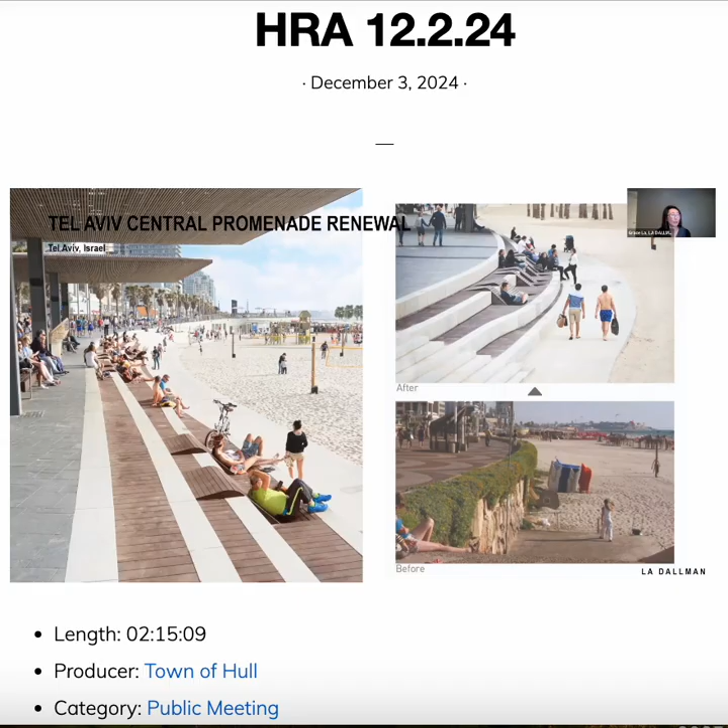How one might think about public amenities and multiple ways to inhabit the edge between water, land, and built form - and layers of use here in terms of outdoor promenades and porticos, which could support some of the other amenities.

Boardwalks - this was actually a sailing club, and it becomes a node.

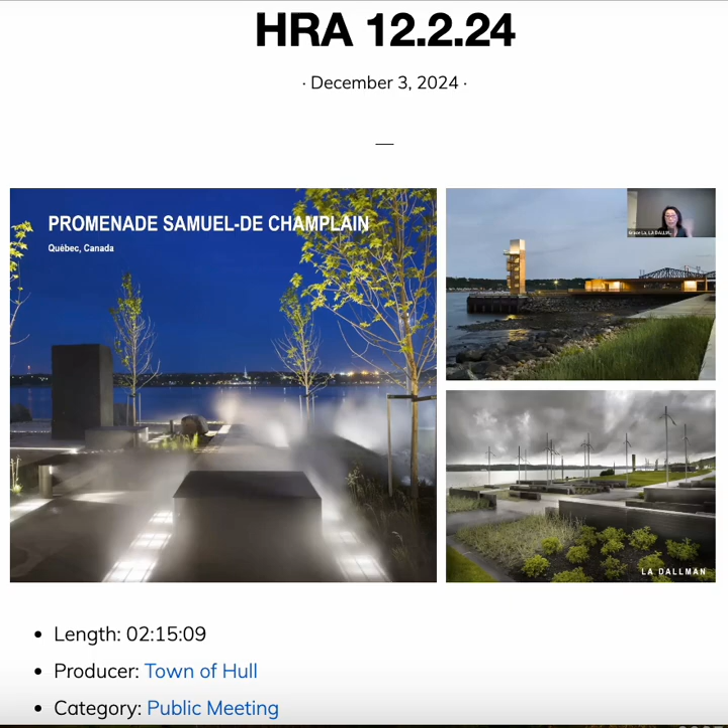And then questions of integrated hardscape, which can then support other functions, from markets to other kinds of street festivals.

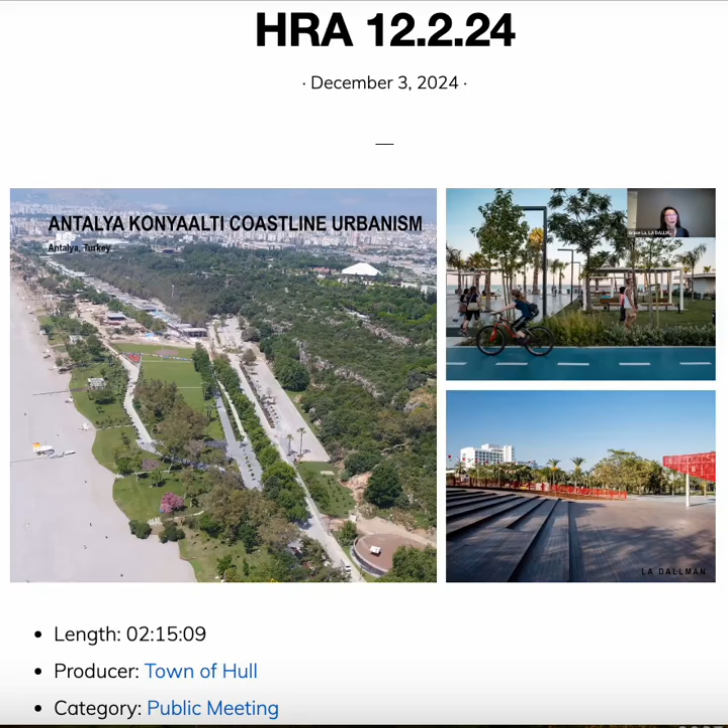Just thinking about how the civic system of your waterfront might be layered, and how it might support multimodal transportation and gathering spaces, including amphitheaters.

Embedding the buildings in the dunes themselves. We thought this was a particularly interesting example of something embedded in the landscape, related to this subtle space where you can look over things and integrate it with vegetation and habitat.

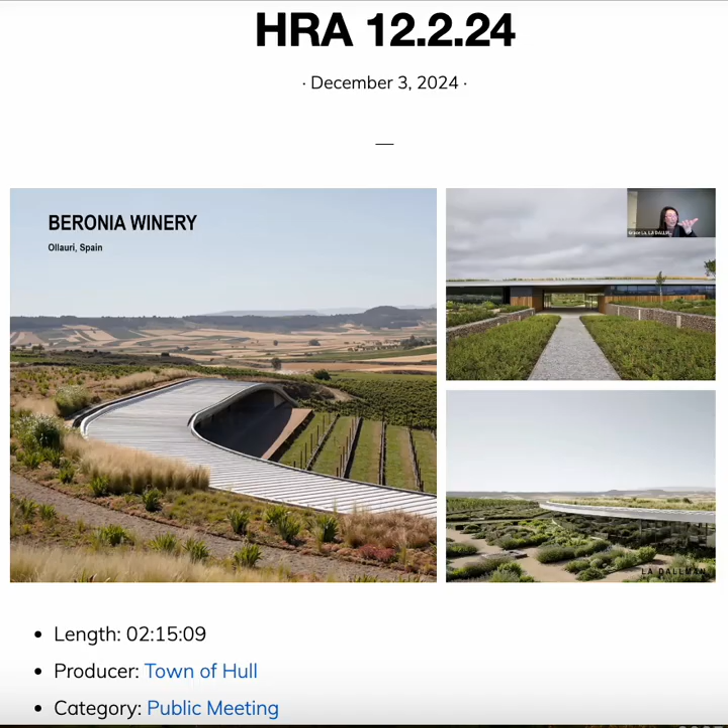And then another idea, another project where the ground plane is almost lifted in a sense and tucked underneath. And again, edge buildings and the ways one can create integrations of paths.

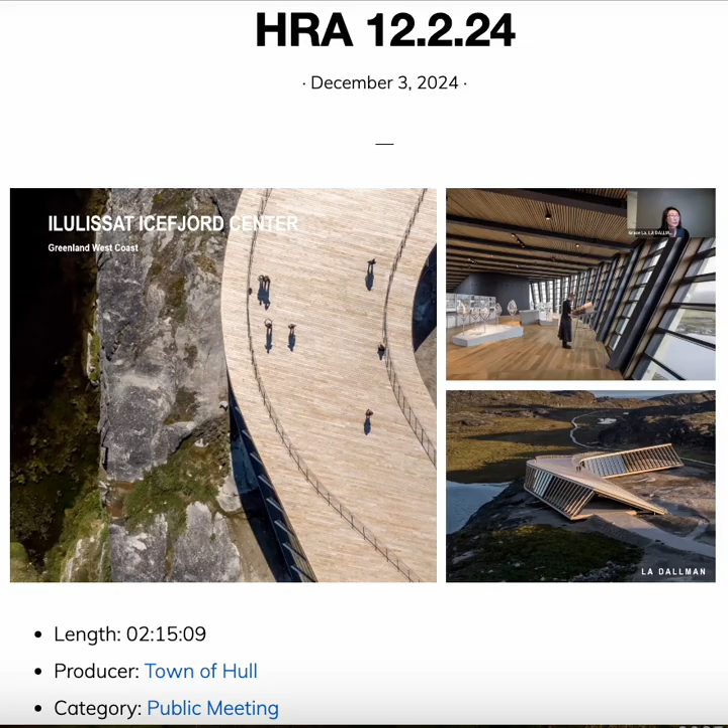And then here, a community center that serves as a gateway, with a second story hovering above, like storage for the site.

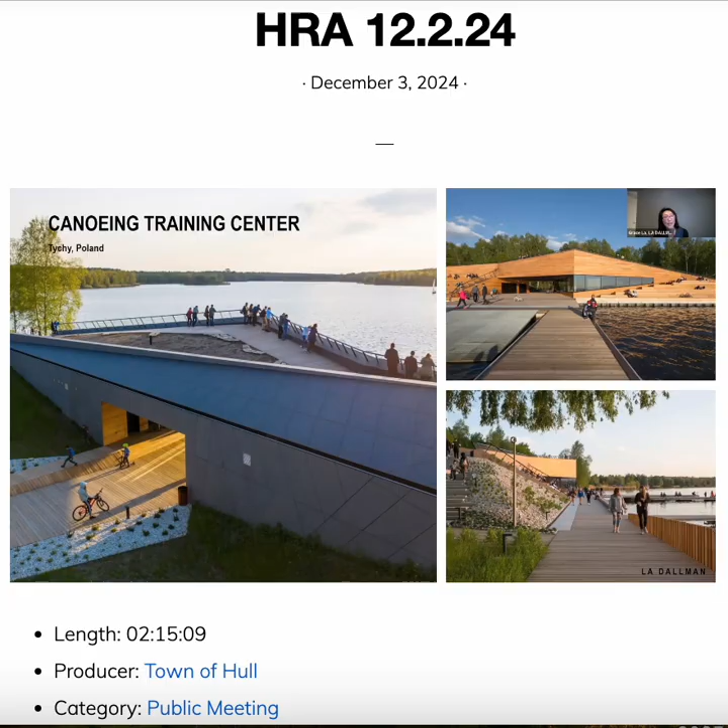And then viewing spots, community program that can serve as edge and is very porous on the site - you could walk through it.

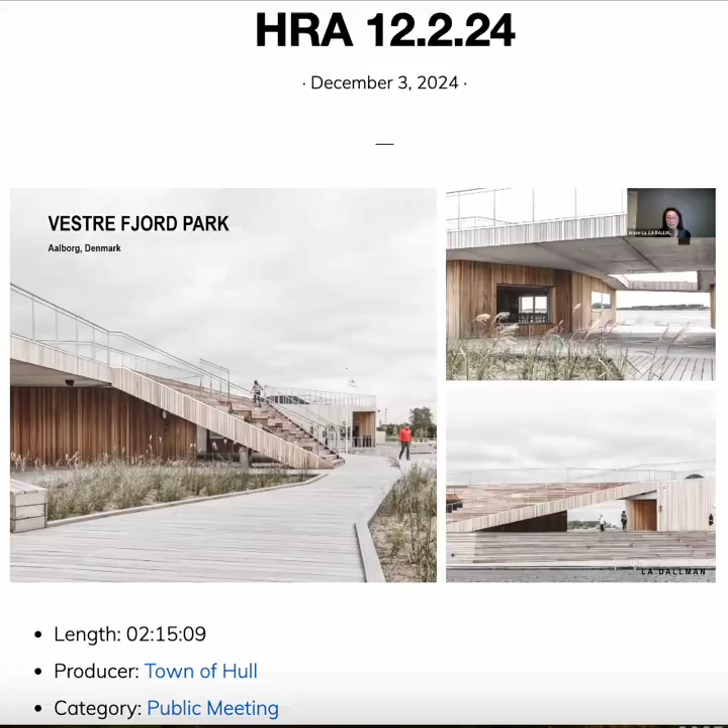Just looking at loving natural materials for built projects on the site, and thinking about pavilions that might be positioned along or situated along a circulation spine.

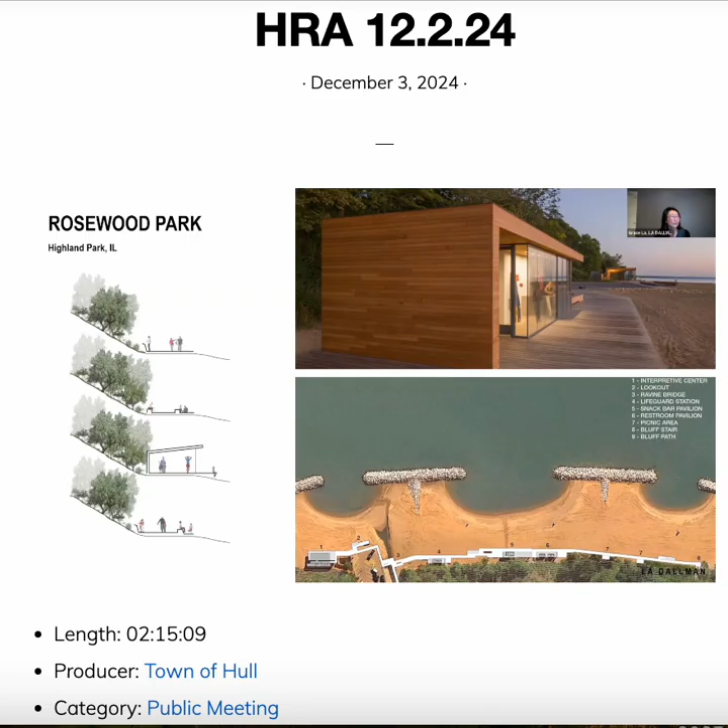And again, these are just some examples of the things that inspire us as we think about how land might be organized and used.

Just to touch a little bit on some ways that one might approach a project that has a master plan and has components that either need to be phased or funded through a kind of public process.

That includes coastal resilience, Mass Downtown Initiative, Commonwealth Places, Underutilized Properties Program, etc.

Others that are about parks and recreation, like parkland acquisitions and renovations for communities, and infrastructure, like Seaport Economic Council, Mass Works.

NEA Our Town grant, which we've actually been awarded a very large grant for in the past, for a research project and master planning project - an NEA Our Town grant, which can really help with design and kickoff of a master plan.

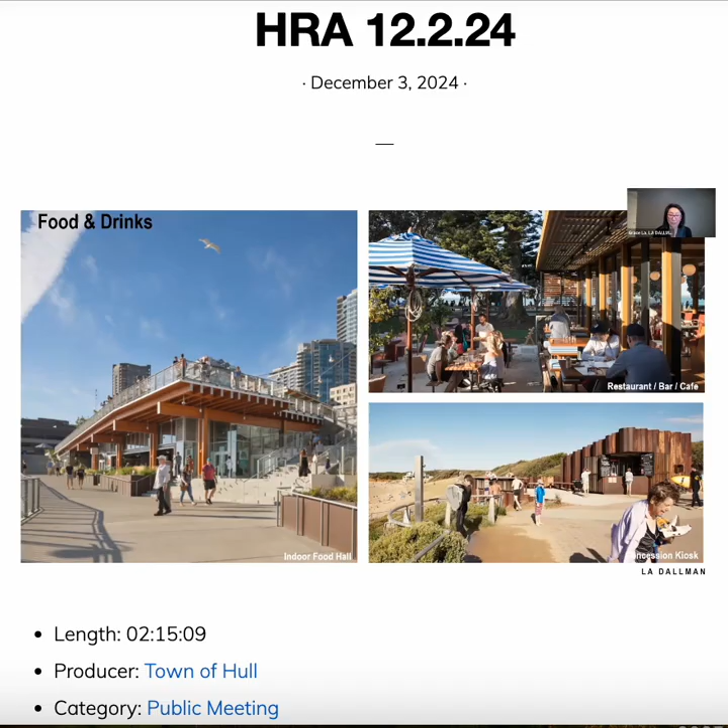A site of recreation usually has availability of food, and we were also thinking about other kinds of things like arts and culture. These are many of the types of programs that have helped propel some of the ways one might think about a site. And of course, health and wellness—especially after COVID, people have really appreciated the relationship to their exterior space, their indoor and outdoor space.